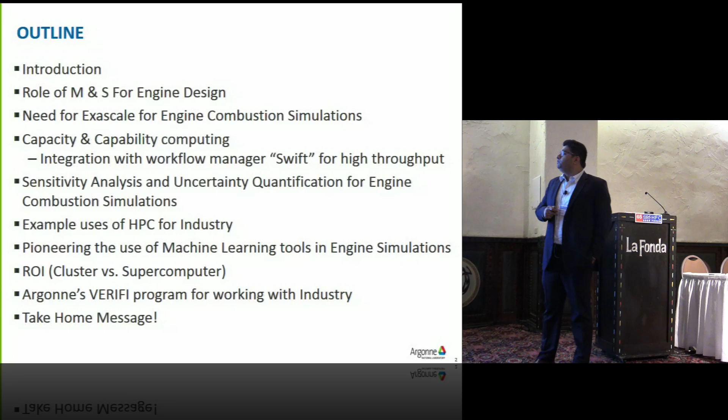I actually work a lot with the industry, and I know that industry is very interested in capacity computing. We'll introduce this workflow manager called Swift that allows us to do high throughput capacity computing. Uncertainty quantification is typically not being used for engine simulations in general, so we have been pioneering the use of uncertainty quantification and machine learning tools for engine simulations. We'll give you one example of each.

We work a lot with the industry. I don't have time to give all the examples, but I'll give you one just to give a flavor of how we work with industry. Typically, when we work with industry, one question that comes up is: industry has clusters, they do not have supercomputers. So they ask us, when does it make sense to work on a supercomputer versus a cluster? I have a couple of examples of when it makes sense to work on a cluster, and when it makes sense to go to a supercomputer.

And then I'll introduce this VERIFI program at Argonne. This is really our forum to work with industry. You can think of it as a consulting service for HPC. We'll talk a little bit, and I'll give you some take-home messages.

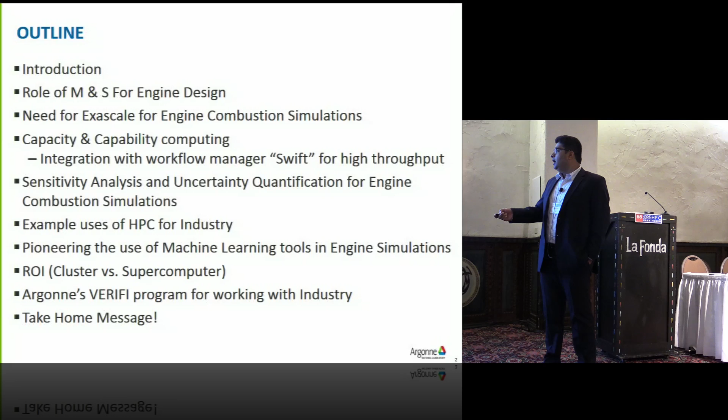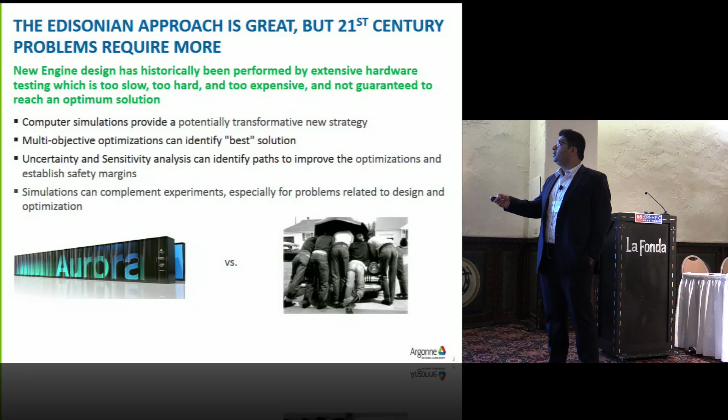So this is really the 21st century. Engines in the past have been designed like this, and car engines have been designed like this, actually, and they work well, surprisingly. But now we have supercomputers that are available, and supercomputers are really good for many things. They are good for multi-objective optimizations, uncertainty analysis, sensitivity analysis, etc.

But really, to use simulations effectively, you need to ensure two things. The first is that your simulations are high fidelity across the design space that you're exploring. The second is that the simulations need high throughput to explore the full design space. This is often a concern when we speak to industry, that high fidelity simulations are not fast enough, so the throughput is actually slow.

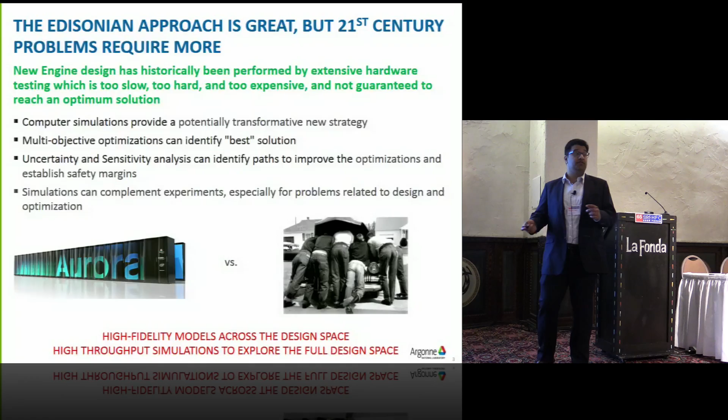And once they're injected into a hot atmosphere, they evaporate, they ignite, they combust. Once they combust, you actually get the heat release, and that's basically what drives your car. So I'll play this movie again - let's see if it works. Yeah, so that's basically what's going on.

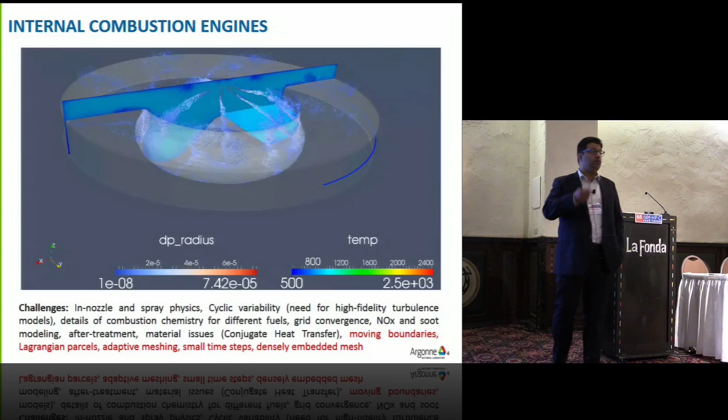But this is actually a very challenging problem. The movie looks cool, but to actually solve this is very difficult. You need to resolve the flow inside the fuel injector, which is a two-phase flow problem - it's very, very difficult to resolve the flow inside the injector. And when you're driving your car, no two cycles of your car are actually the same.

So there is a lot of cyclic variability from one cycle to another. That's very, very difficult to simulate. It involves getting the right turbulence model in there. Fuel chemistry is very challenging.

It's actually large. Typically, simulations scale with the cube of the number of species that we have for fuel chemistry. And the fuel chemistry is actually different. If you go to your gas pump, take octane rating of 97 versus 91 versus 95, the fuel chemistry is actually different.

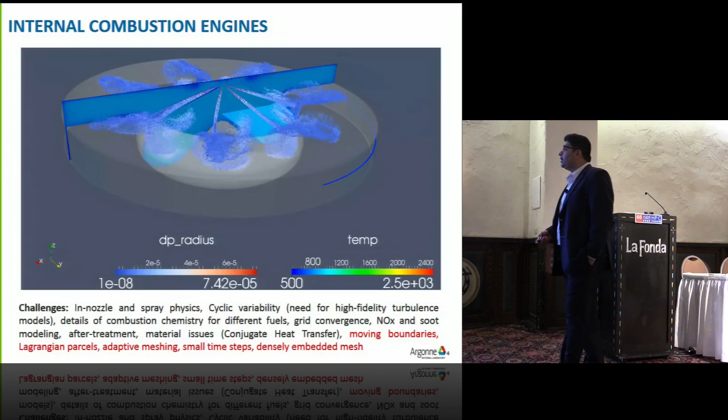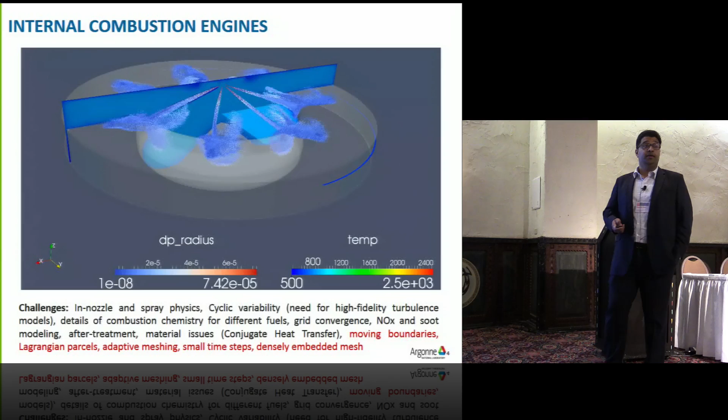So how do we account for that? And then, of course, having correct emission models, doing the material issues correctly, doing the conjugate heat transfer - these are all very, very challenging problems. I often tell my postdocs that an engine is probably the most complicated HPC problem. I think many people in the room will disagree with me, but that's what I feel, because we have moving boundaries, Lagrangian parcels, adaptive meshing, very small time steps, very small length scales, and most importantly, densely embedded meshes.

So it's a very, very complicated problem to actually scale. So the role of modeling and simulations for engines has typically been experimentally driven. People spend a lot of effort doing experiments, and they try to match their simulations, simplified simulations, to the experiments, and then use those simulations to guide their design.

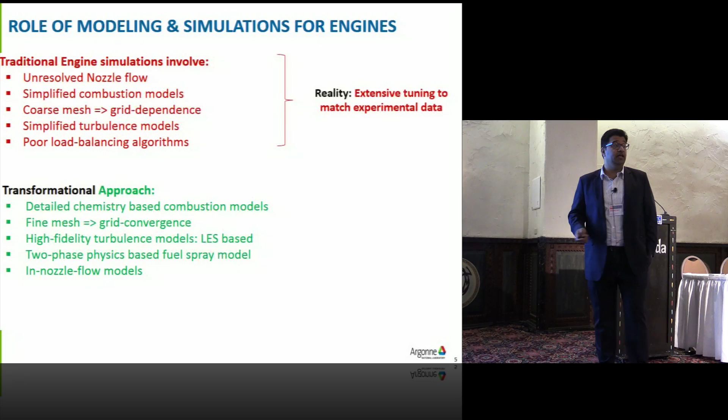So what we have been doing at Argonne is actually a transformational approach. We are trying to implement higher fidelity combustion models, higher fidelity turbulence models, higher fidelity two-phase flow models, and then couple them together with the exascale architectures that are going to come online. And this hopefully will make us predictive.

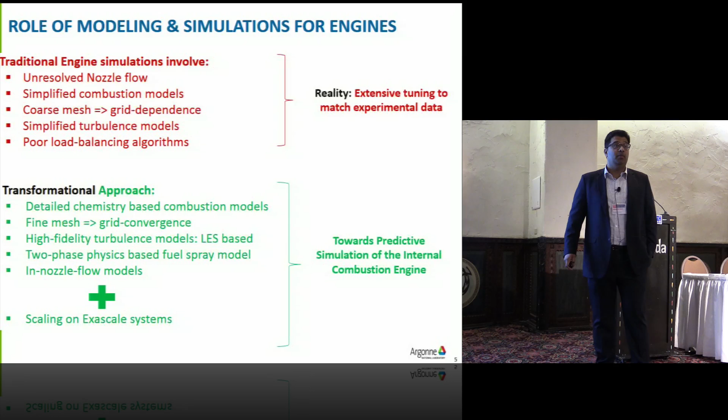We are not there yet. We are really not doing predictive engine simulations yet, but that's sort of my job security for the next 20 years. I hope we'll get there in 20 years.

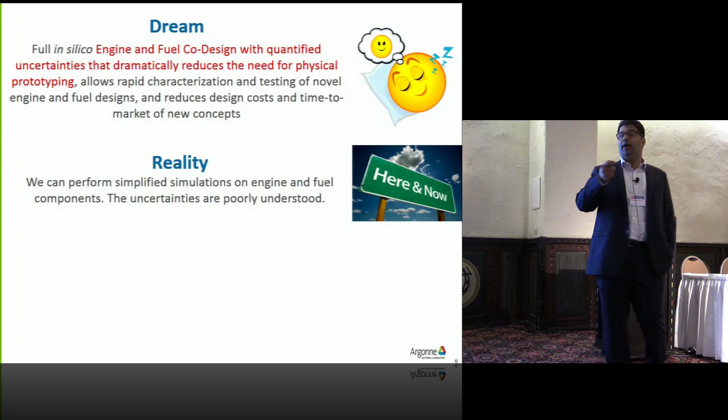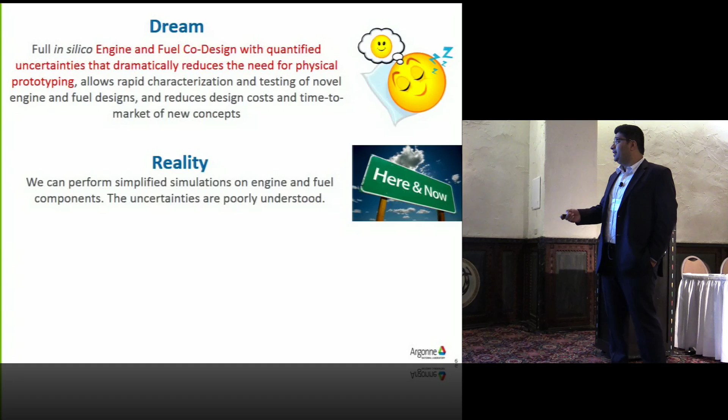So the dream is to do a full engine simulation with fuel embedded in that, and to really do it by understanding all the uncertainties. It's very, very challenging, just because of what I said. The reality is that we are able to do some simplified engine simulations, and the uncertainties are poorly understood.

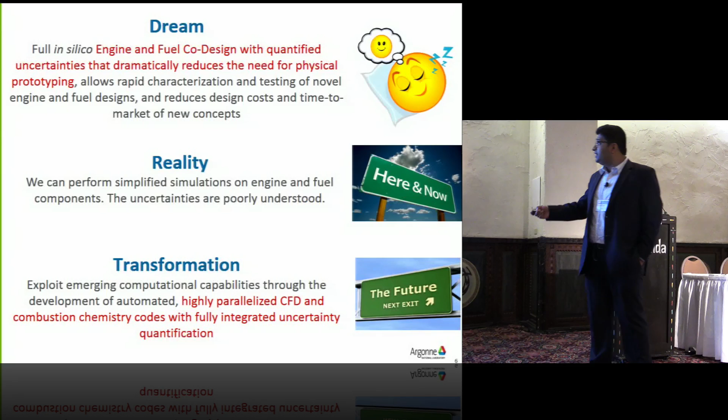So the transformation is really to develop this highly parallelized CFD code with fully integrated uncertainty quantification. And we are somewhere in the middle here, and we'll talk about some results as to how we are trying to do this transition.

So this is a slide by my colleague, Dr. John Deur. He's Director of Engine Research at Cummins. We have had collaborations with him for the past 6 years. So the way he explains this is very interesting.

So he says at Cummins, they do sector simulations. Instead of doing a full 360 simulation, they do a sector simulation. They use chemistry mechanisms which have about 50 species. They use RANS type of turbulence models.

So if I were to ask him, what would it take him to get truly predictive? Of course, he has to do full 360. He has to have LES type of turbulence models. He has to resolve the flow inside the injector. He has to accurately model the spray physics. And 50 species to represent a complicated fuel is just not enough - you probably need 500 species.

So if the turnaround time in the industry, typically at Cummins, is 24 hours - they want to get their results in 24 hours - and typically when they do these sector calculations, they use 64 cores. Now all these are multiplicative, right? So if you want to do a truly predictive calculation, you actually need 500,000 times more cores.

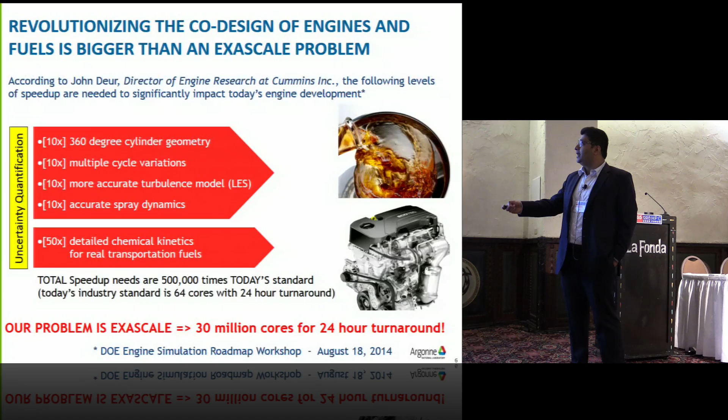So our problem is actually an exascale problem. We need 30 million cores to still get the turnaround time with these. And this doesn't even include uncertainty quantification. Uncertainty quantification is another layer over this, right?

But what we have now is almost an exascale machine. So even if we had the whole machine, it wouldn't be enough to do this problem in a predictive manner, right? So that's why we resort to modeling.

So we really classify our problems in two ways: one is capacity computing, one is capability computing. So on the left is capability computing. Here we do simulations using thousands of cores, and these simulations take a long time, often 2, 3, 4 weeks.

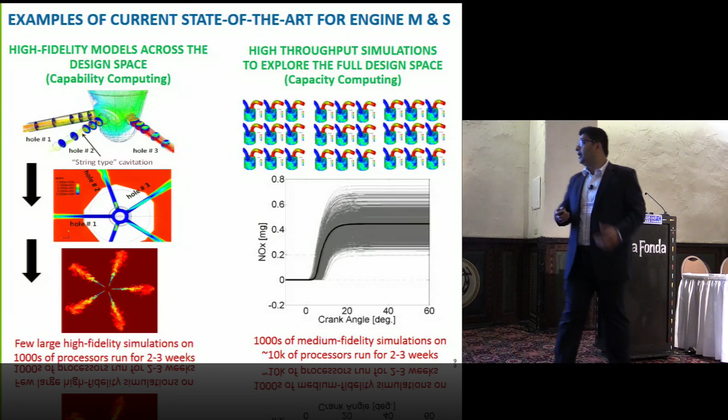And the data that we generate, we believe, is complementary to experiments, okay? And typically for industry, we do not do many of these. Industry likes capacity computing - that's what I'm showing here. Capacity computing is really having the ability to run thousands of cases very quickly. And even by doing capacity computing, we use thousands of processors, tens of thousands of processors. But typically, this is what is the preferred approach in the industry.

So often engines are being designed by intuition of experimentalists, but typically if you rely on intuition, it doesn't work if you're trying to design a new combustion system.

So what we have tried to do here at Argonne is we imported this engine simulation code that's used in industry quite often. It's called Converge, and we ported it to Mira. In order to port it to Mira, since it was really not designed for a supercomputer, we did a lot of work: MPI-IO, we improved the load balancing schemes, we improved the interprocessor communication. Then the code was actually ready to run on the supercomputer.

Once we were able to do that, we wanted to do a demonstration problem. We wanted to run about 10 to 12,000 simulations, each running on 64 processors, so that we'd be using the whole of Mira, which has about 768,000 processors. Why do we want to do this? Basically to speed up, to get high throughput. Even if you have an army of postdocs, it's impossible to run 12,000 cases manually.

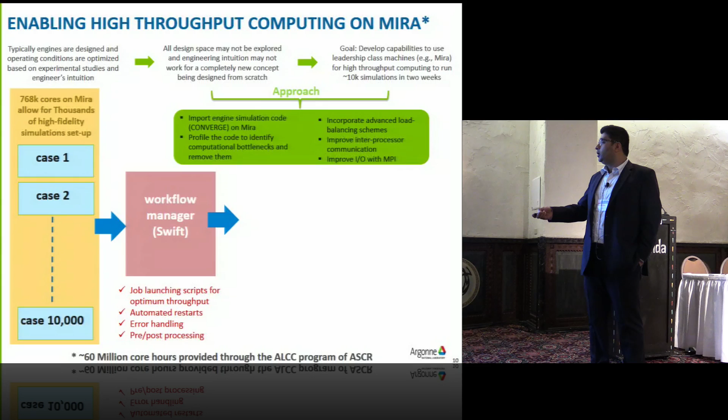So we integrated this workflow manager called Swift. It does a lot of these things in an automated fashion. I'm not going to go into the details, but this work was actually possible because of the core hours we got through an ALCC program from ASCR.

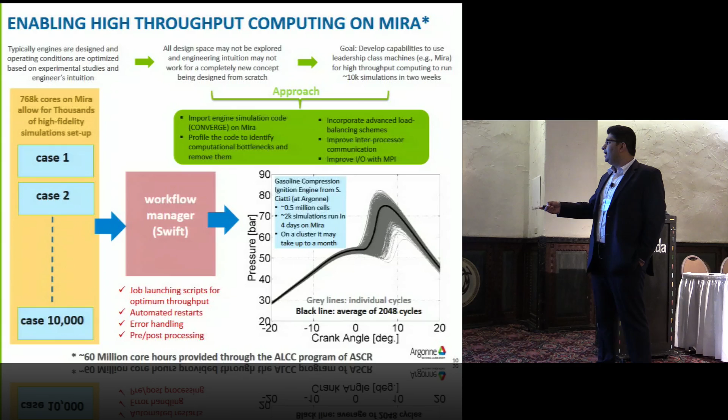And what did we learn from this? We actually helped optimize a new combustion system called gasoline compression ignition—I'll come to this later in more detail. Typically, we demonstrated that we were running 2,000 simulations in 4 days, which in a cluster would probably take a month. So really improving the throughput of our calculations.

So I want to give maybe an Engines 101 lesson here, and there'll be a quiz after this—no, I'm kidding. But the 101 lesson is that we at Argonne have been trying to design a gasoline compression ignition engine. Dr. Steve Ciatti has been leading this program for 7-8 years, and now Delphi is actually making a car out of this idea.

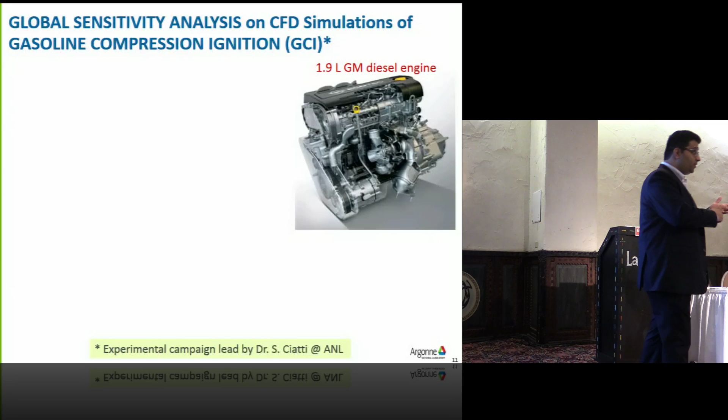So those of you who know engines, it sounds strange, right? Because diesel fuel is usually compression ignited, and gasoline fuel is actually spark ignited. So what we're talking about is compression igniting a gasoline fuel. In theory that shouldn't work, but we've been able to make it work with experimental work and also with simulations. That's one of the examples I'm going to give here.

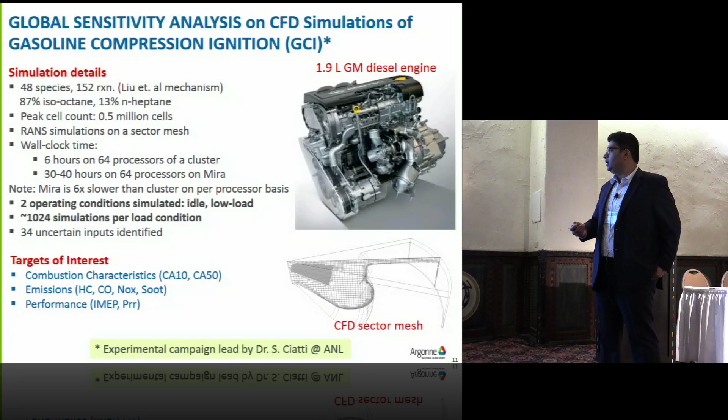A lot of the challenges of making it work were at idle conditions and low load conditions. We were able to do a lot of calculations and simulations to guide the injection strategy and the piston bowl design in order to do this. So I'm going to show you some examples, looking at these low load conditions and how we were able to achieve good combustion at these conditions.

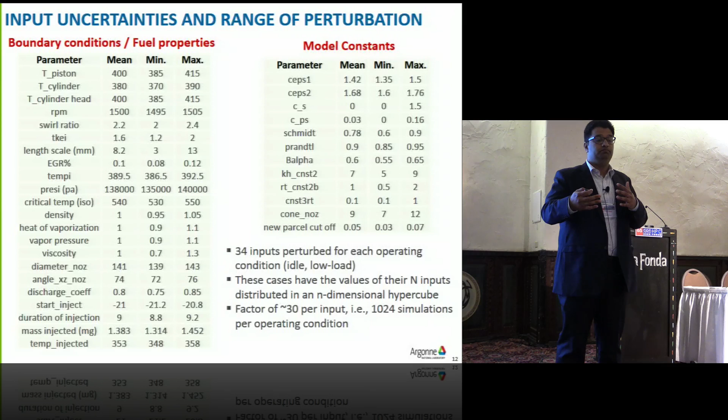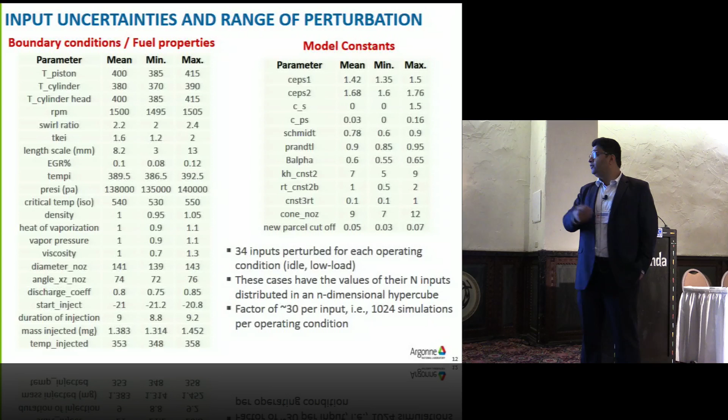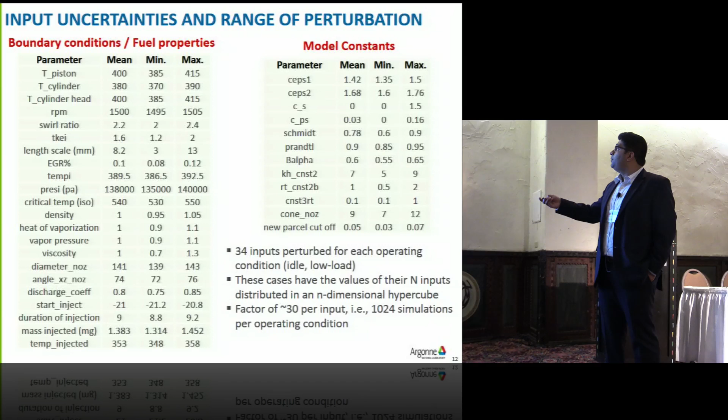So we looked at different parameters that influence a combustion system—for example, start of injection timing, the amount of fuel injected, the duration of injection, the internal EGR (exhaust gas recirculation), how hot your piston bowl temperature should be. We looked at all these parameters and assigned some uncertainties to them. Because we're doing it in simulation, we also had models, so we assigned uncertainties to our model parameters too. These are our boundary condition uncertainties, and these are our model parameter uncertainties.

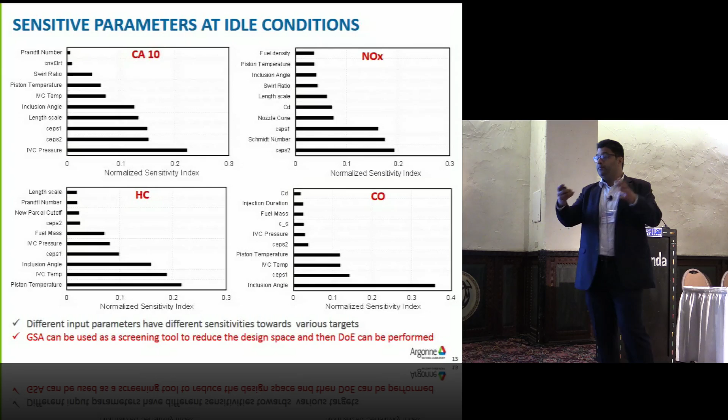We coupled them together and ran thousands of calculations again, using this global sensitivity analysis tool we developed at Argonne. It's really a precursor to an uncertainty quantification tool, and we get really nice insights. For example, CA10 here is ignition delay—the amount of time it takes for the fuel to ignite once it's injected. We learned that pressure at intake valve closure is very important, and it actually guides the ignition delay. We were able to provide a lot of insights like this to the combustion process that really helped our experimentalists design this engine.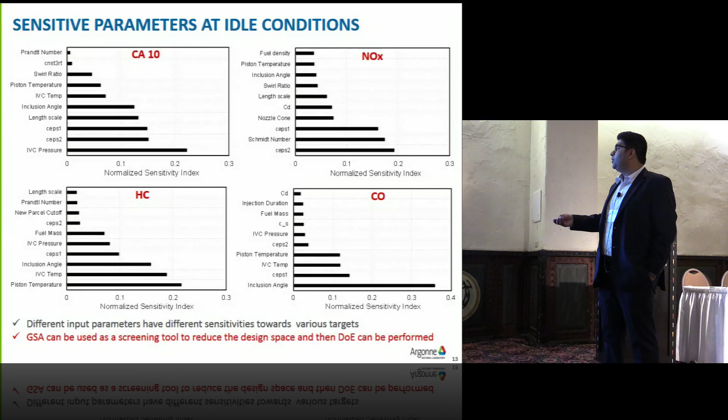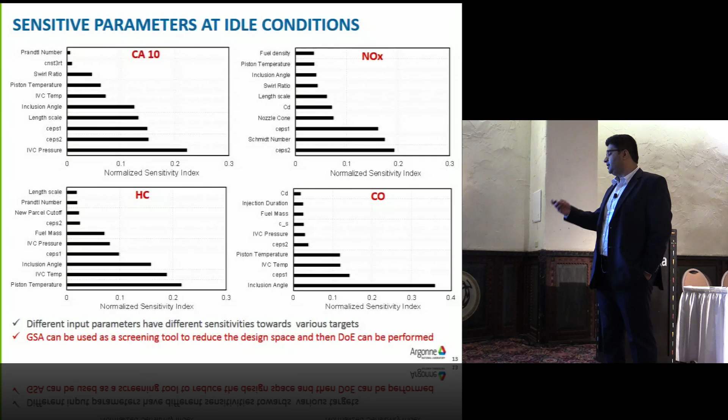And here I'm showing you NOx, hydrocarbon emissions, and carbon monoxide emissions, and we were able to demonstrate what input parameters—whether a model parameter or an experimental parameter—were actually influencing the results. So if it's a model parameter, we understand what to do.

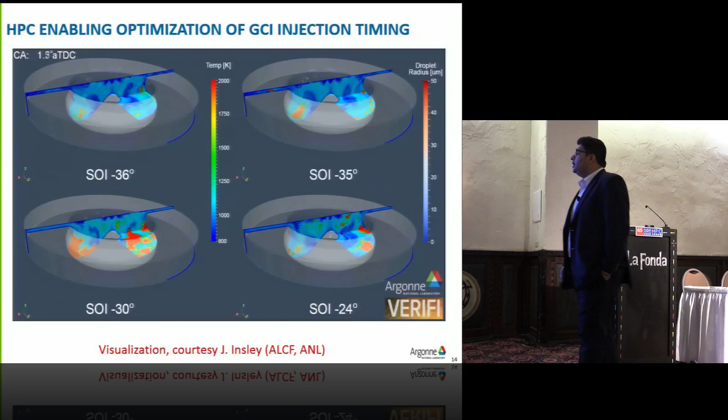If it's an experimental parameter, that's an input to the experimentalist, and they modify their design based on this. So this was a massive optimization problem then.

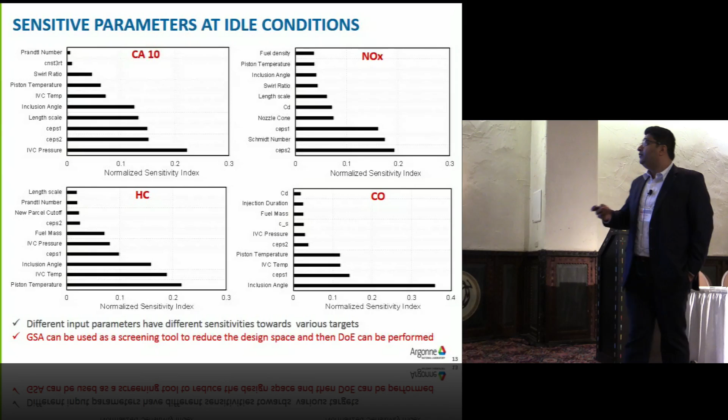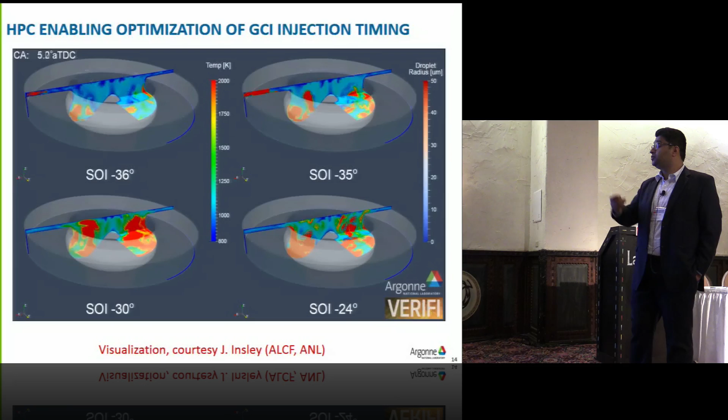Once we understood the uncertainties, the start of injection of the fuel was a big uncertainty. This is the same movie I was showing earlier, but now for different start of injection timings. SOI stands for start of injection.

So if we inject too early, what we observe is that a lot of fuel actually goes into this thin squish region, and it doesn't burn properly.

If we inject the fuel too late, we observe that the fuel doesn't have enough residence time to actually burn inside the combustion system.

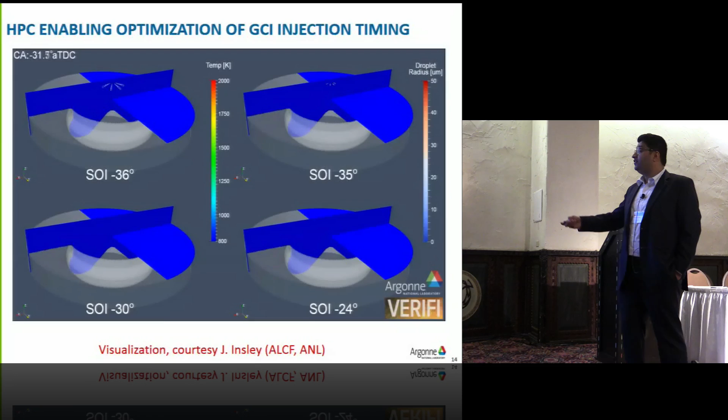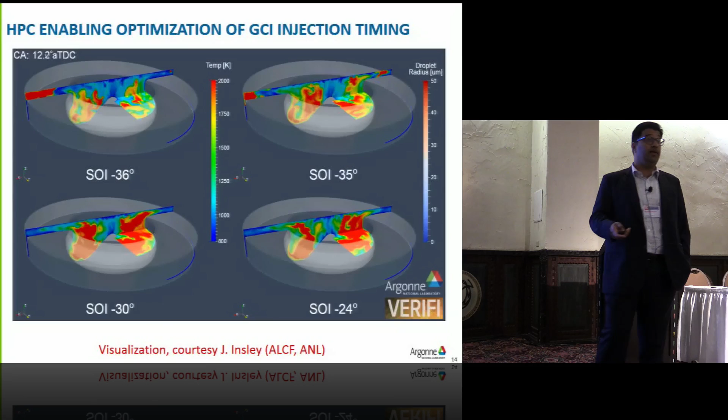So what we learn is with high fidelity CFD, we were able to provide some guidance as to what should be the right injection timing. And then they went ahead and did the experiments and got confirmation that indeed around 30 degrees is a good timing. So this was a good success story for us.

So I have a couple more examples. I talked about cyclic variability a little bit, saying that in an SI engine, no two cycles are the same. If you're driving your car, it's highly unlikely that two cycles of your car are the same. So in the engine community, there is a lot of interest in trying to understand the sources of cyclic variability.

For example, if you get a high cycle, your engine may knock. If your engine starts knocking many times, you can have a catastrophic failure of the engine. Many times if you have a low cycle, that means you have low pressures, and your engine can actually misfire. None of these are actually good for the engine.

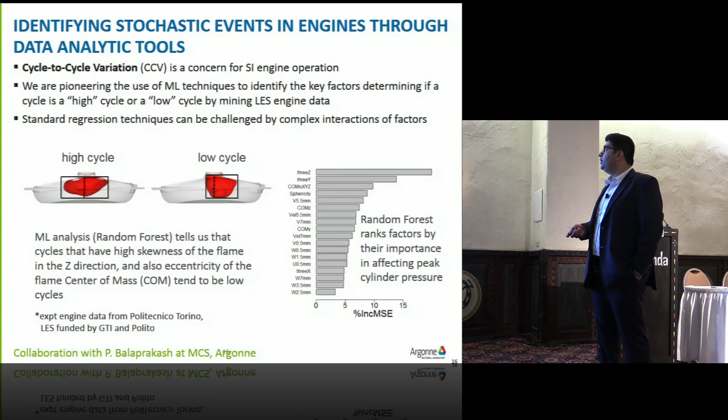Experiments only provide some insights, but we are trying to use simulations and machine learning techniques to really understand the causes of these high cycles and low cycles. So we are using this random forest method. We understand that standard regression techniques really do not work well when you have highly stochastic events, so we are trying to use random forest techniques to understand what are the sources of CCV.

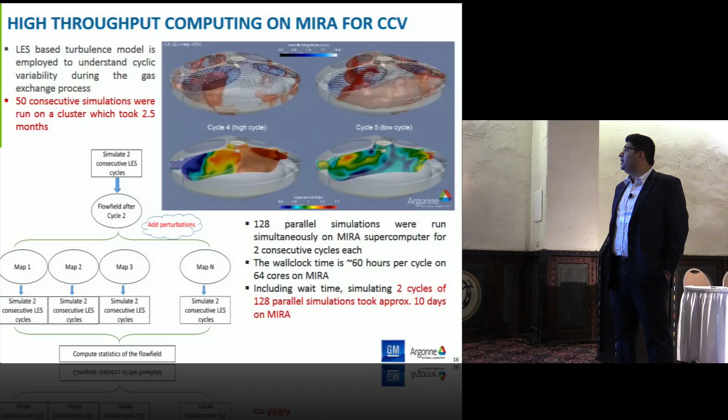So here is another movie. This is work that we did with GM. Typically, what we try to do when we are studying CCV is we have to run many cycles, right? We have to run maybe 100 or 1,000 cycles because it's a very stochastic event.

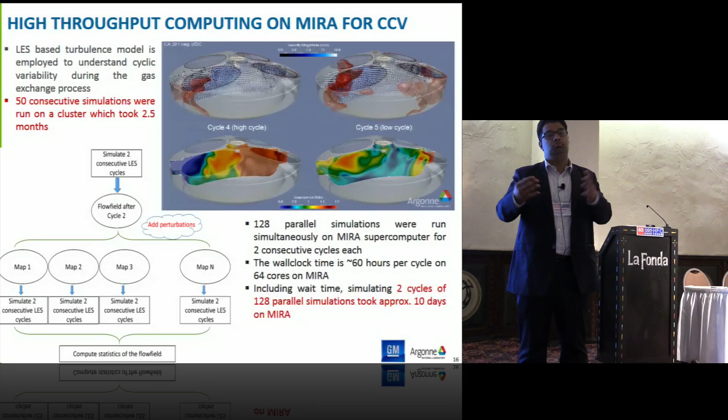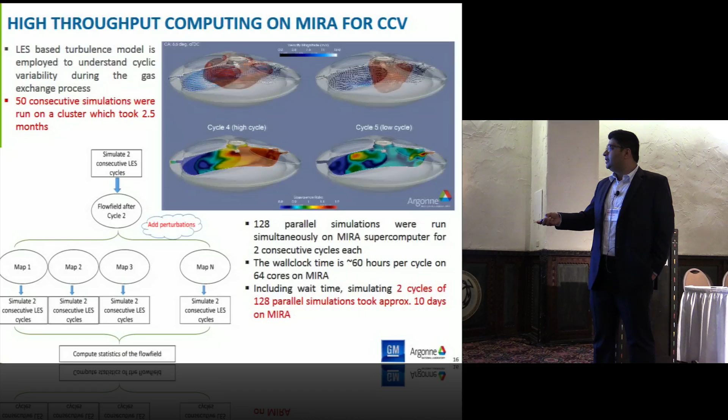Running 100 or 1,000 cycles will take months to a year, depending on the computer access you have. So what we have developed is a technique that allows us to perturb the initial conditions in a way that the statistics we compute out of the CFD simulations are representative of running 1,000 cycles consecutively. The GM guys actually ran 50 consecutive cycles that took them about 2.5 months.

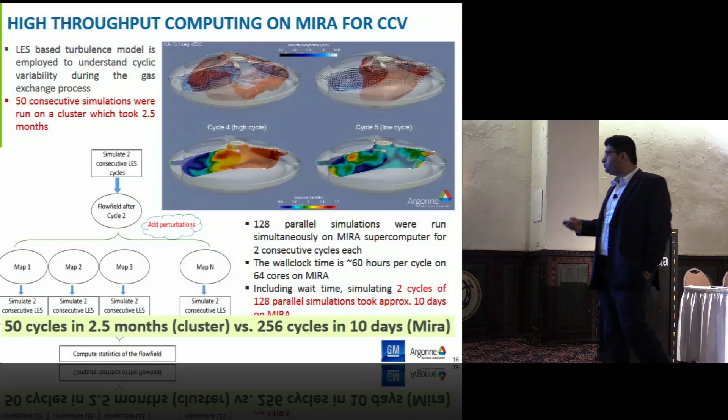We actually ran 256 engine cycles in 10 days on Mira, so you can clearly see the change in throughput that we are able to get by doing this.

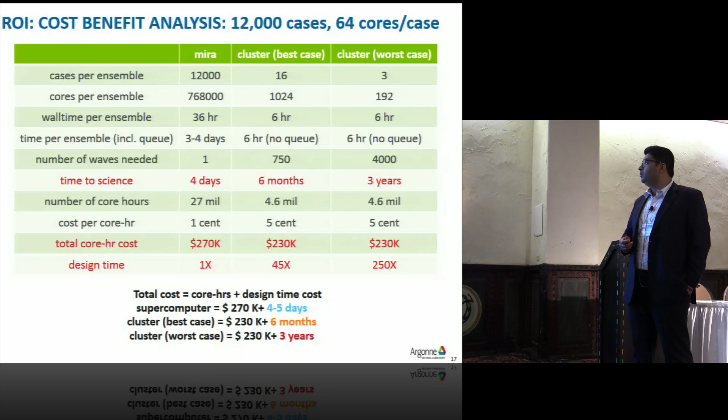So typically our industry folks ask, when should we use a cluster? When should we use a supercomputer? What problems are good for a supercomputer? So we actually did this ROI analysis for them.

So the goal here is lofty. We wanted to run 12,000 cases. Of course, we wanted to show that you want to run on a supercomputer, so we took a lofty goal of trying to run 12,000 cases.

And we came up with scenarios. So if an engineer at GM, at best case, probably has access to 1,000 cores on a cluster, at worst case, he probably has access to 200 cores on a cluster.

So if you want to run these 12,000 cases to really optimize a combustion system design, on Mira, you can get it done in 4 days, if David Martin is kind to us. But on a cluster, it may take 6 months. In a worst case scenario, it may take 3 years.

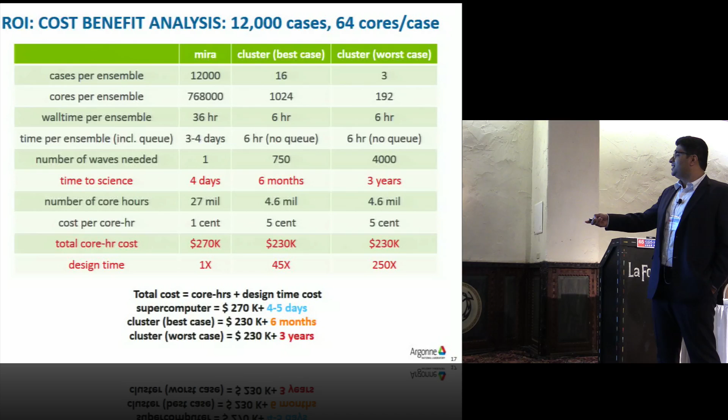So then if I try to do a total cost analysis, total cost is basically time to science. Time to science is really core hours cost plus design time cost. So on a supercomputer, it's about, let's say, 270K plus 4 to 5 days.

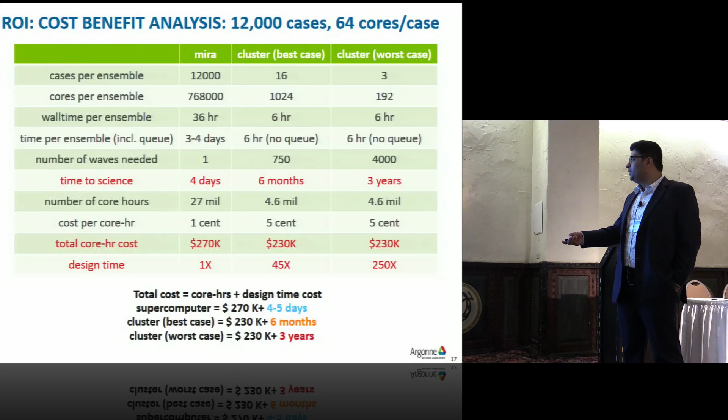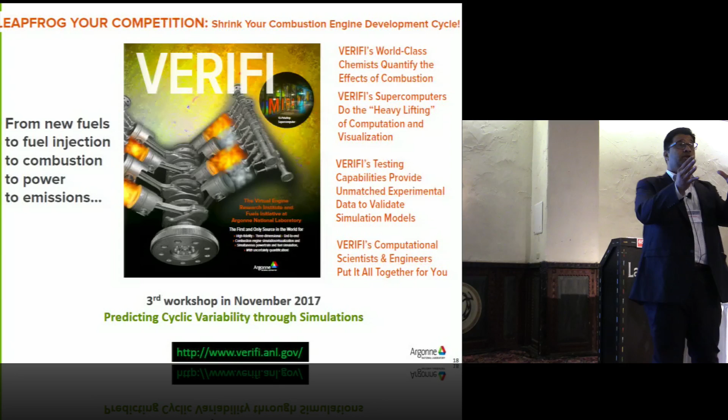But on a cluster, it's a little less in terms of money, but really it's 6 months to 3 years. So it's really not feasible to do this. That's why people take shortcuts and reduce their design space. They don't want to run 12,000 cases.

They probably want to run 1,000 cases instead. So I'm coming to the end of my talk. What we have developed at Argonne is this forum to work with industry, called VERIFI. It stands for Virtual Engine Research Institute and Fuels Initiative.

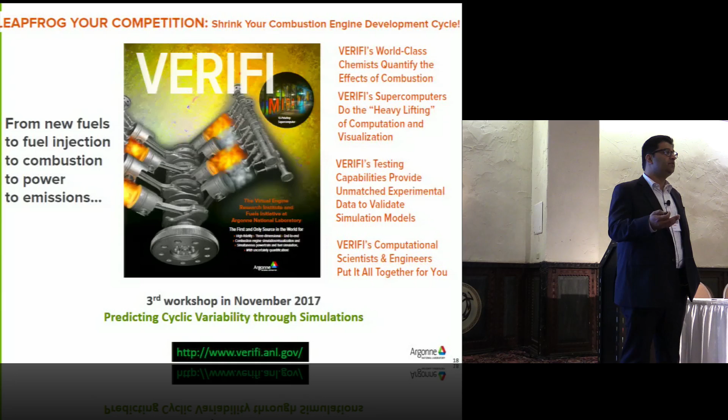A lot of words, but it basically is a consulting service for industry to work with us. The industry would come to us with a problem of their interest, and we try to provide HPC solutions. We also have workshops with certain themes. The next workshop will be in November, with the theme of predicting cyclic variability using simulations.

This is really the mechanism with which we work, being in a national lab. We have access to DOE Office of Science people. We work with the computational scientists at Argonne who help us scale the code, and with the chemists at Argonne who help us write chemistry for these fuel molecules of interest. We are mostly funded by EERE, so we interface with DOE Office of Science people and try to develop engineering level models.

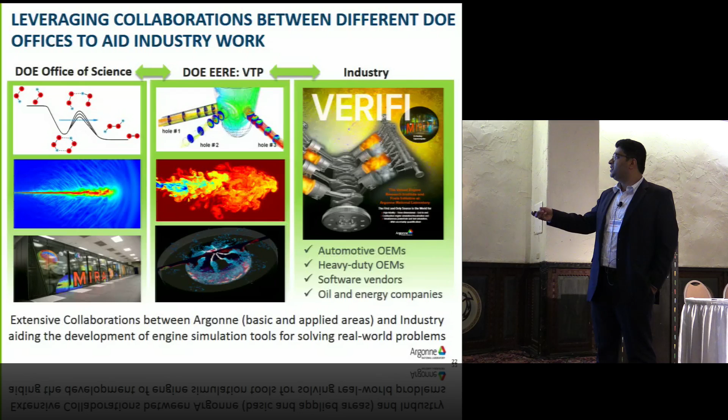We have developed several models, and a lot of these are then scaled on an HPC system. So these models are first developed, validated, and then we also spend a lot of effort trying to make them scale on a supercomputer.

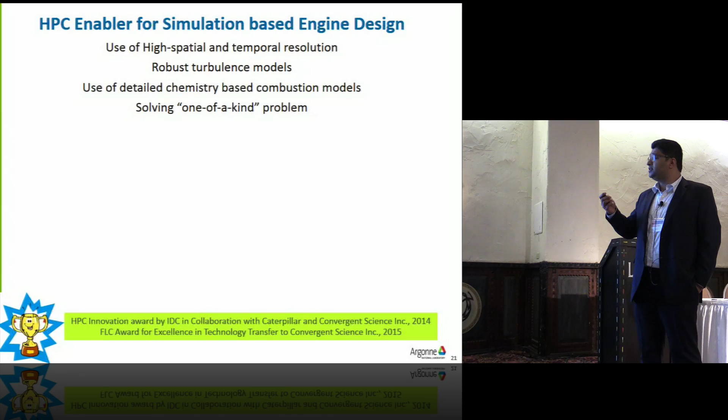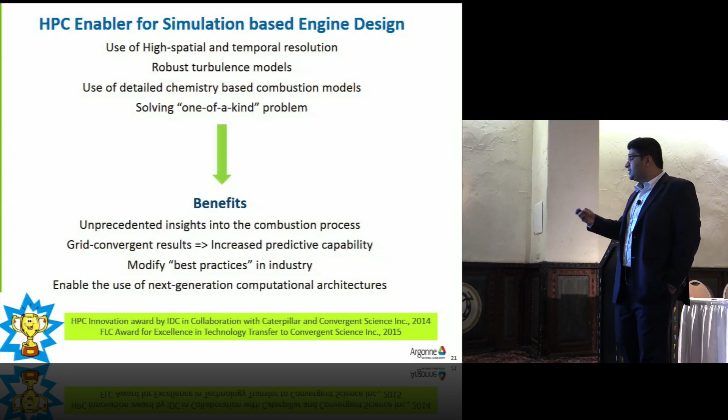This is my last slide. I'd like to say that HPC is actually an enabler for simulation-based engine design. It allows us to use high spatial and temporal resolutions, robust turbulence models, detailed chemistry, and we can solve one-of-a-kind problems. The benefits are really unprecedented insights into the combustion processes and increased predictive capability.

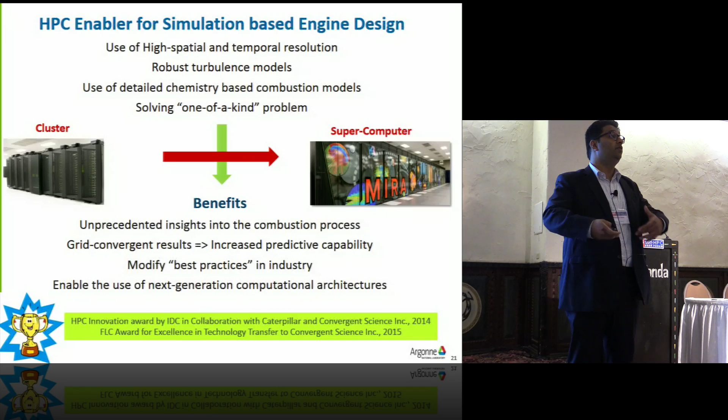And in many cases, working with industry, we have been able to modify their best practices. So whatever we have developed, the industry folks have been able to take into their in-house workflow, which has been a great success story for us. We were quite happy, and we won a couple of awards.

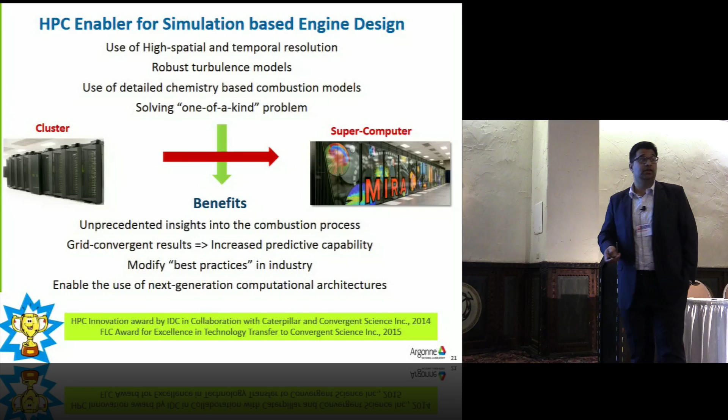In 2014, we won the HPC Innovation Award by IDC. This was in collaboration with Caterpillar and Convergent Science. In 2015, we won the Federal Lab Consortium Award for Excellence in Technology Transfer to Convergent Science. So it has been 2 years, and we haven't won any awards since, so we are working on it.

Can you describe a little more the award that you got for the federal technology transfer? What was the technology transfer that you did, and how did that work?

Yeah, so we actually developed some technology for spray modeling, two-phase flow modeling, and we scaled that technology, demonstrating that that model will actually scale on a supercomputer. So that's the technology that was developed and transferred to Convergent Science.